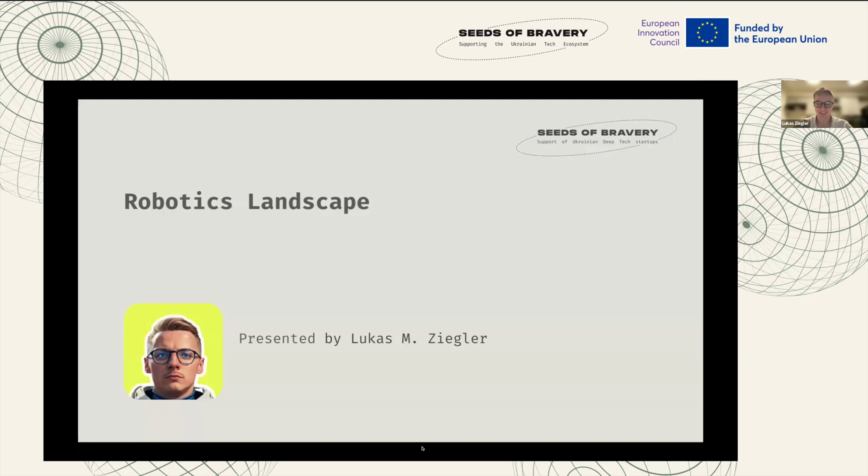Maybe before I start, I would like to share my presentation, just to start with the introduction and obviously with the topic that we're gonna discuss today.

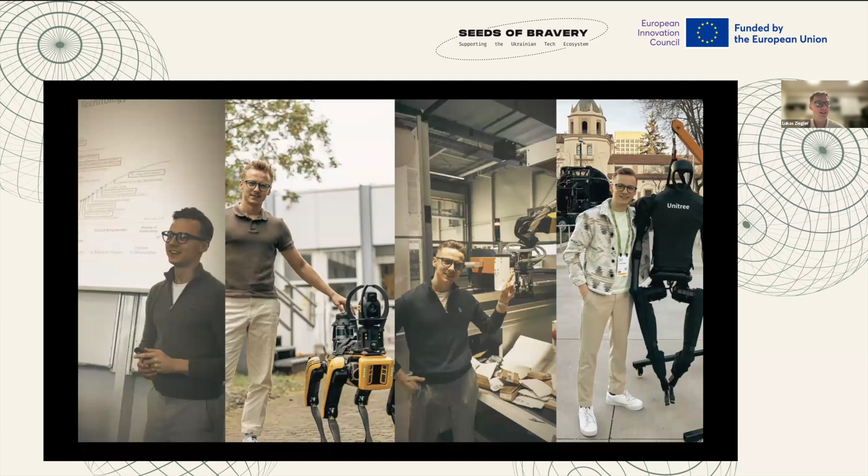So I like to call myself a robotics evangelist. My name is Lukas Ziegler, as I told you. It basically means that I love to talk about robotics whenever and wherever I am, about robotics applications, about use cases, about the trends and the new industries opening for robotics.

As Maria mentioned, I managed to build a 250,000 community on Twitter, LinkedIn, and newsletter, talking to robotics founders about their cool companies, just trying to learn the lesson of what's so important in building robotics companies, especially in deep tech, especially right now when AI is the real enabler of those companies.

I spent my whole life in robotics. I started as a programmer 7 years ago of Universal Robot Arms, then as a project manager for plenty of autonomous mobile robots projects. Afterwards, I joined multiple startups, starting from Poland, then in UK and also in Germany. The last one was Energy Robotics.

You can see also the spot from Boston Dynamics. So we were putting those robot dogs into dangerous environments, for example refineries, chemical plants, or power plants, where those robots were collecting data in real time. So we had a full-fledged autonomous robot system: data collection, data transformation with the help of AI and machine learning, but also very easily to connect via API to any system. It was really like an end-to-end robotic solution that we were able to deploy.

It was a startup around inspection robots, which is a pretty new market when you think about visual inspection for robotics. So I can also give you a couple of lessons learned from there.

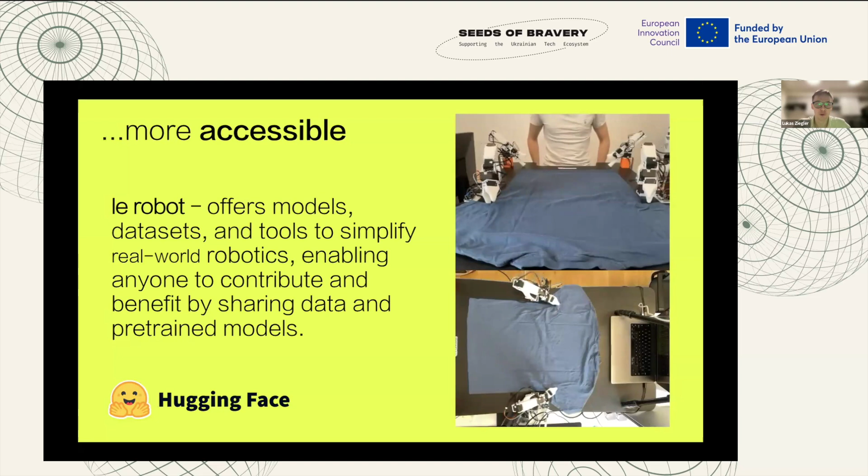In this video I'll turn the sound off. You can see they are teaching a robot arm to fold a t-shirt using a super low-cost robot arm that costs $300, by training a neural network with two cameras, one from a MacBook and one from an iPhone. The model itself you can train in about half a day. This is very important to make robotics accessible to everyone, not just people from universities or research labs, but anyone that can join that space.

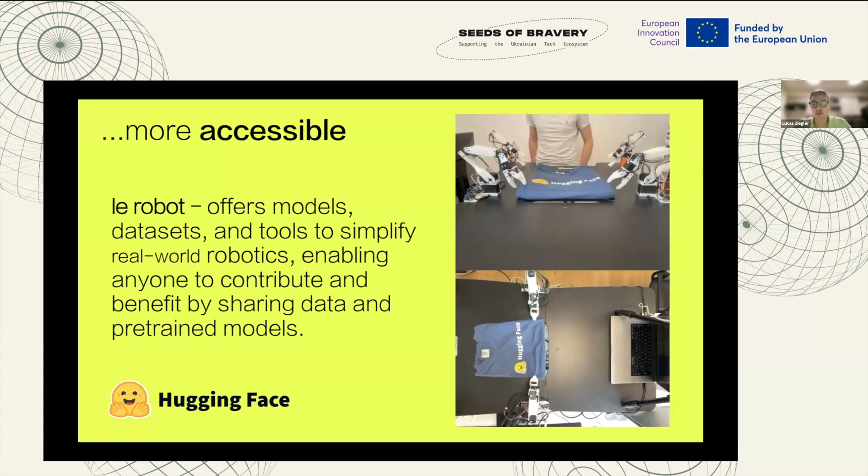And right now it's possible due to the lower entry point that these companies are helping us achieve. So you no longer need a super fancy university lab to start with robotics and combine it with different machine learning concepts. You can start small and use a lot of open source resources to do so.

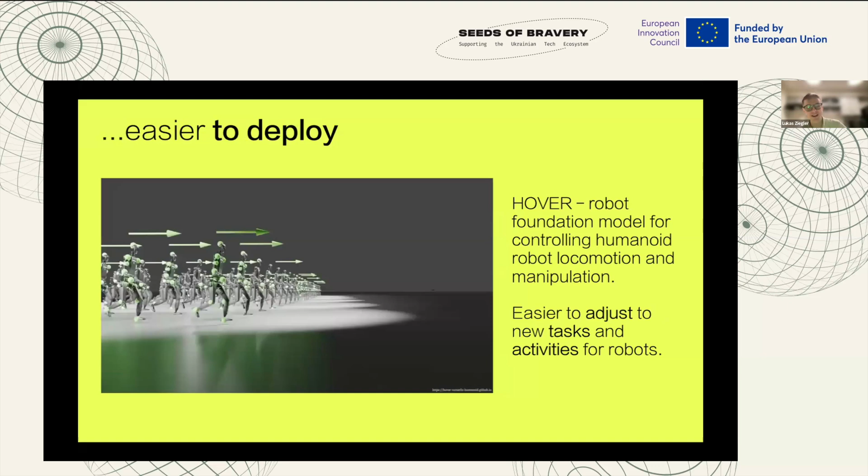The next one. I also told you about easier to deploy. So here I wanted to talk about Project HOVER. Imagine you can train a humanoid for an entire year, but in just 50 minutes. I know it sounds a little like Interstellar, but it's actually real. NVIDIA partnered up with top universities to create HOVER, a system that accelerates physics simulation by 10,000 times.

HOVER basically helps humanoids control their entire bodies. Instead of just training one separate task, they focus on a big picture approach, so you can have one system to rule it all.

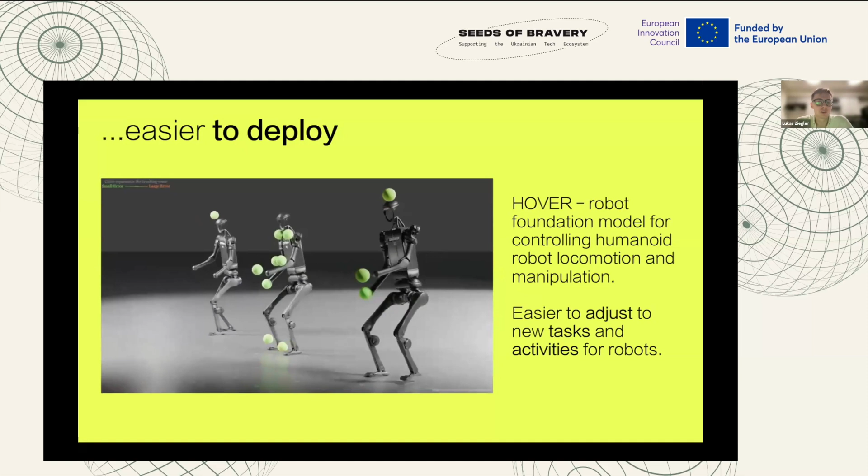Why is this so big in my opinion? Because right now we see a lot of humanoids succeeding with funding, doing first proof of concept projects. But it will really be a game changer when we have frameworks that allow you to copy and paste applications from one robot to another. Imagine uploading one task from one robot to another and the robot can immediately start doing it. This is what I believe those kinds of projects will make ease of deployment and ease of scale-up happen.

Because right now, when companies start with new technology, they typically start with a classical early adopter program or proof of concept with one or two robots, where they're just trying to capture how much value those technologies provide. Sorry, I saw the hand, Jody.

I think it may have been a mistake. Okay, no worries, super. But it's good I noticed, that means everything is working properly on Zoom.

So as I said, just to wrap it up, easier to adjust and add new tasks to robots. So this is when it comes to ease of deployment.

All right, and this is also a tricky one, but I decided to mention it because maybe not everyone is aware that dexterity is one of the toughest AI challenges, because tasks like tying a shoelace or tightening a bolt, tasks we do without even thinking, are super complex for machines.

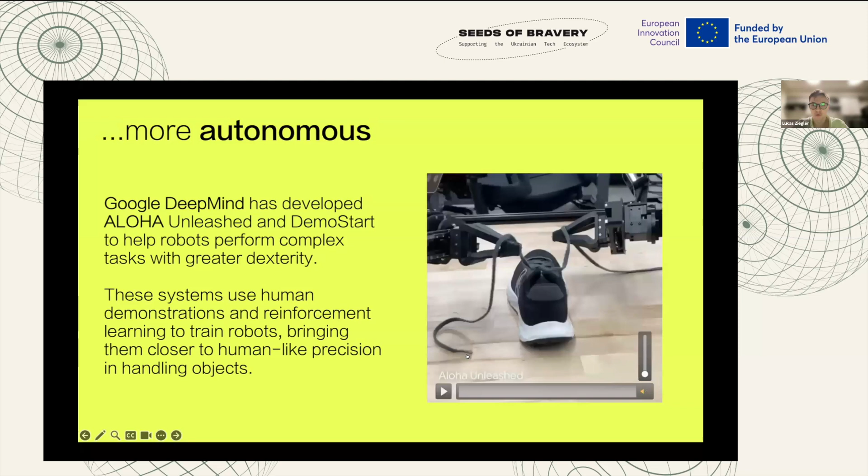This Google DeepMind research I want to show you is actually changing the status quo. First, ALOHA basically helped the dual arm perform complex autonomous tasks, for example tying a shoelace, as you can hear over here. And then you have the DemoStart, which teaches robotic hands more dexterity.

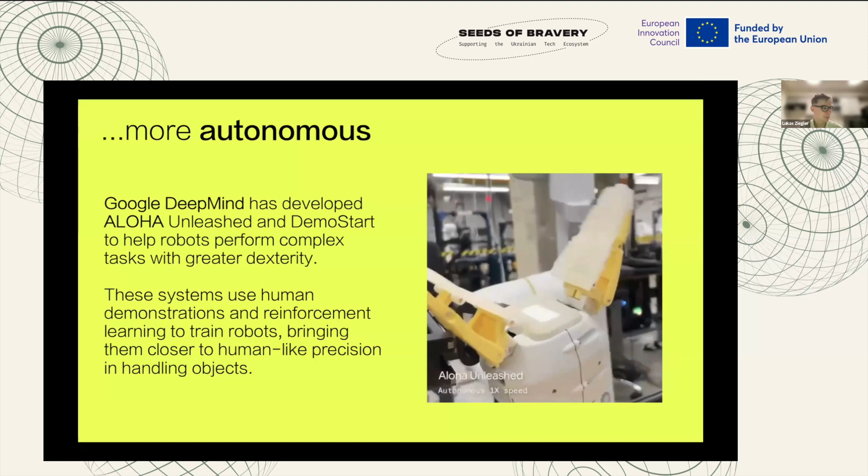Why am I so bullish about it? Because in the end, these frameworks will help us solve very complex manipulation tasks. We know we're trying to apply robotics right now into spaces that aren't super organized, into different changing environments. So robots must be more adaptable and react to the changing environment. This is why I'm so bullish on this kind of research pushing robotics forward.

All right, so let me go further, obviously to the key trends and rising tech. When we come to humanoids, just a second, something got stuck here on my side. There we go. So when it comes to humanoids, we all know what's happened in the last year. I don't have enough fingers to mention how many wow moments have happened during the last day.

So Figure raising more than $600 million as a funding round last year. Two weeks ago, they just announced that they might be raising another round for the Figure robot. It's the robot from California, from Sunnyvale, already working in BMW.

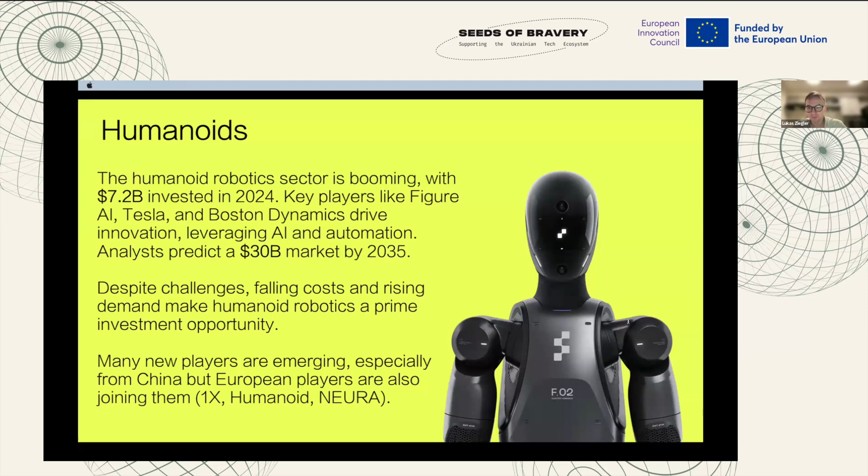All right, so let me go further. Here I wanted to show you the humanoid robot from the United States, Figure, in one of the BMW South Carolina plants. This is actually the first humanoid being placed in a BMW factory, and their robots are capable of carrying up to 20 kilograms, performing easy tasks, but end-to-end autonomously.

As we know, Figure recently broke their agreement with OpenAI when it comes to AI and foundation model development, and they announced last week that they developed Helix, their own vision-to-language-action model that helps the robot scale faster. They said that this use case you're going to see right now - inserting metal pieces into a machine - they were able to achieve it in like 8 to 12 months. Right now they claim they can do it in days.

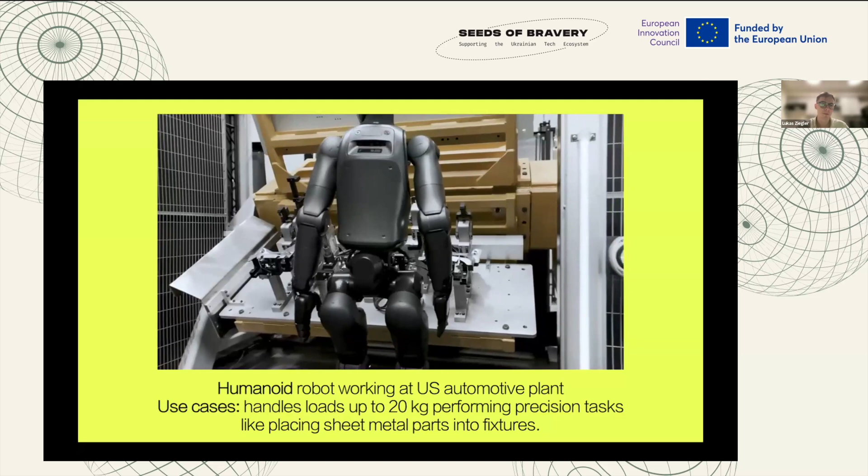With their new model, if you want to Google them or find them on LinkedIn, you can just type Figure, and you can see their latest video from yesterday where they showed the same robot doing repetitive tasks, but in a completely different industry - in a logistics center, third-party logistics center, where it was basically putting parcels from the moving conveyors onto the output trays.

It's Cobot, a startup also from America, founded by Brad Porter. He's the ex-VP of robotics from Amazon. He was actually the key enabler of the Kiva systems that everyone knows - the multiple thousand fleet of robots at Amazon to scale up. Right now he's come up with a solution that will help different industries with very easy tasks, but with a very specific range of applications. So it's not like the approach for humanoids, hey, you're going to get a general purpose robot you can use wherever you want, you can place it in your home.

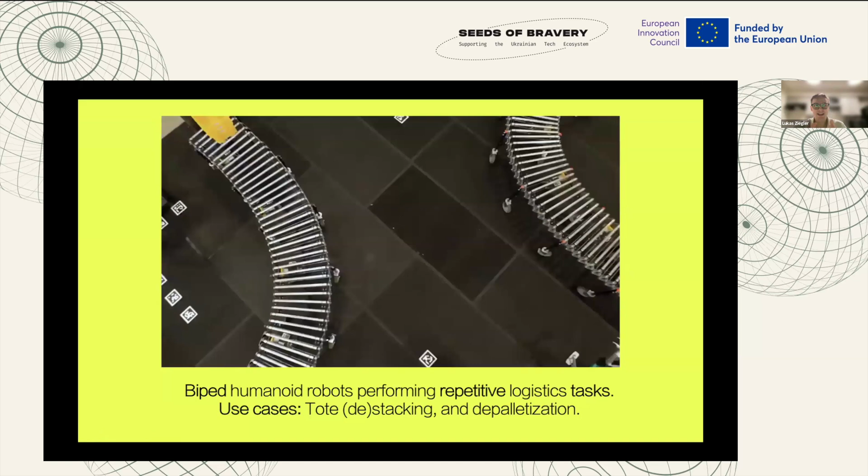Okay, let me show you a humanoid that accidentally became also a use case solver for one industry right now. So here you can see Digit. Digit is basically a humanoid robot developed by Agility Robotics, and this is a robot dedicated for the logistics sector. So what's so special about Digit? Actually, Digit can fit into any environment without any prior upgrades of the environment, so it can basically retrofit into it.

It also has a leg design that is inspired by birds, obviously not for the sake of mimicking nature, but to make sure the robot has the right agility and stability while working in the logistics environment with conveyors.

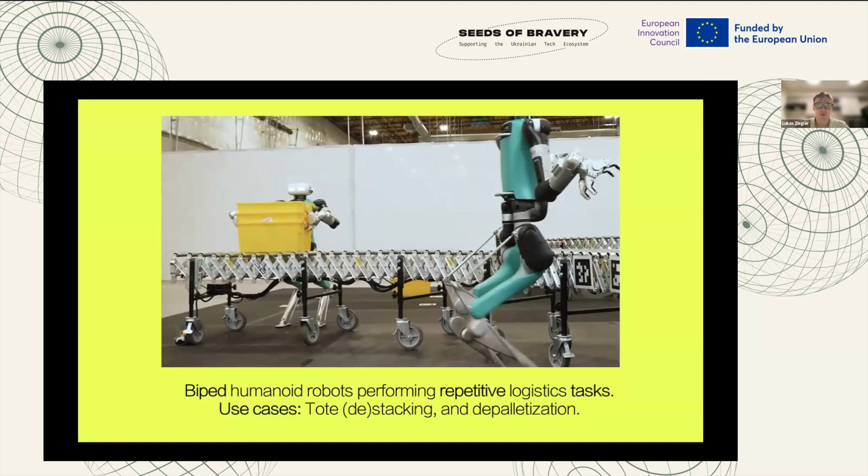One can also notice the specially designed and custom gripper. The gripper actually helps to work with totes, and there's a lot of applications with totes for that robot. So it's stacking, destacking, palletizing, depalletizing, but also transfer applications, for example taking the tote from the conveyor and putting it onto the shelves.

So there's really a lot of use cases, and actually that's not just a POC. Those robots are already working for top Fortune 500 companies like GXO Logistics or Amazon. So those are already working and applying value in a lot of companies.

And here I wanted to show you a very cool video also from Brightpick, a specific purpose-built robot, also for logistics use cases, basically to work with shelvings and totes. No special flooring or guidance required, so they are fully autonomous. Via API, they're able to connect to your warehouse management system, so they can get the orders and know what they need to do at one time, along with the fleet management software.

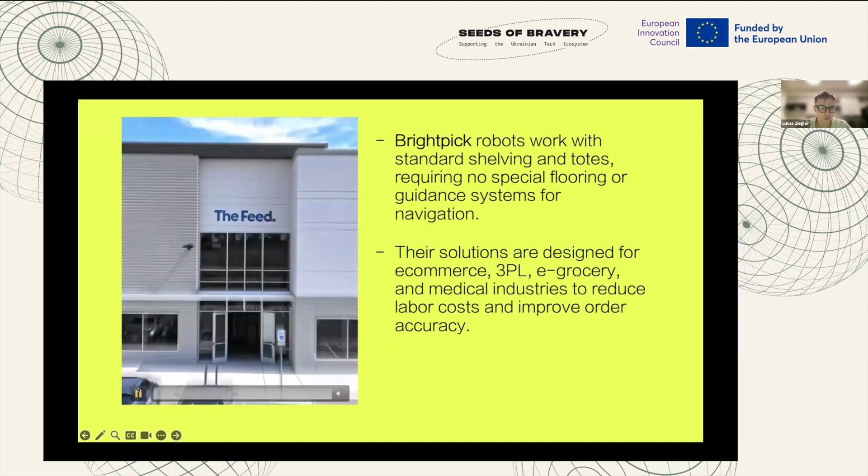So let me also show you what a specific purpose-built robot can look like. As you can see, it can walk with wheels, so it's like having legs. It also has an arm, so it's like having arms. So it's like a less error-prone humanoid robot. They can also do manipulation challenges at a certain height, as you can see.

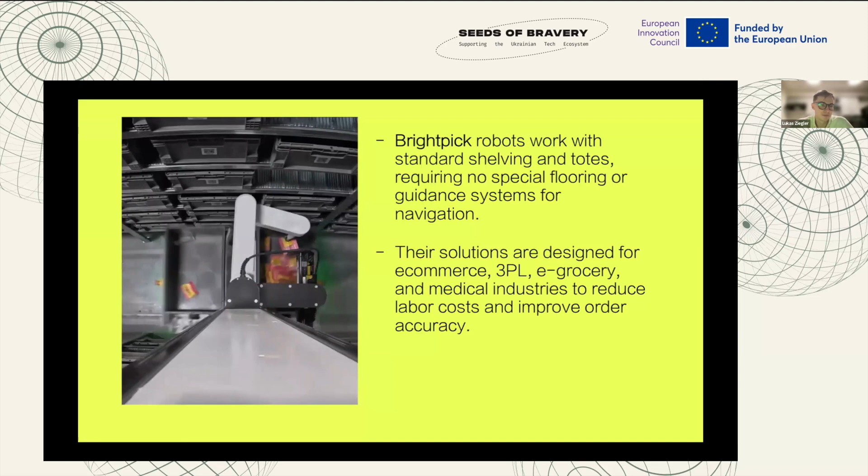And they also got in total around 20 million, I believe, in funding. 12 million was like 2 or 3 months ago. It was also dedicated for the expansion to the United States.

All right, so that's when it comes to that.

So what kind of products can you expect in enterprise software? Data analytics software that can, for example, improve robotic performance over time. But you can also see a lot of interoperability solutions, for example Energy Robotics. Energy Robotics is a software platform for inspection robots, robot agnostic, which means...

you can connect different kinds of mobile or legged platforms like Boston Dynamics, Anybotics, and plenty of others. This means, in the end, you as the asset owner, oil and gas company, chemical maker, can have just one platform to rule them all. You don't care if you have different types of robots, because we all know there is no perfect robot to do all kinds of tasks. That's why it's so important to have an orchestration platform to do so - data analytics and orchestration platforms that allow real interoperability around your robots.

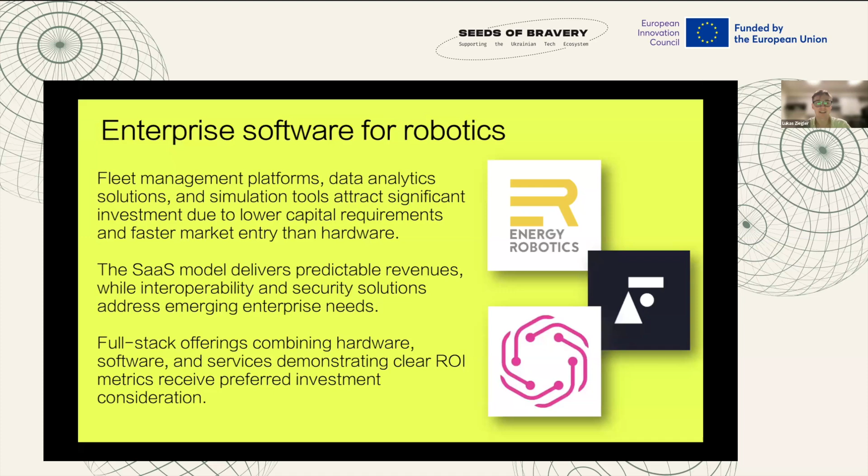We all know that these days robots are not just about hardware. It's actually a combination of superior enterprise software and a great piece of metal, which is the hardware. So it must be both - applying the robo brain with AI and outstanding tech when it comes to mechanics and hardware.

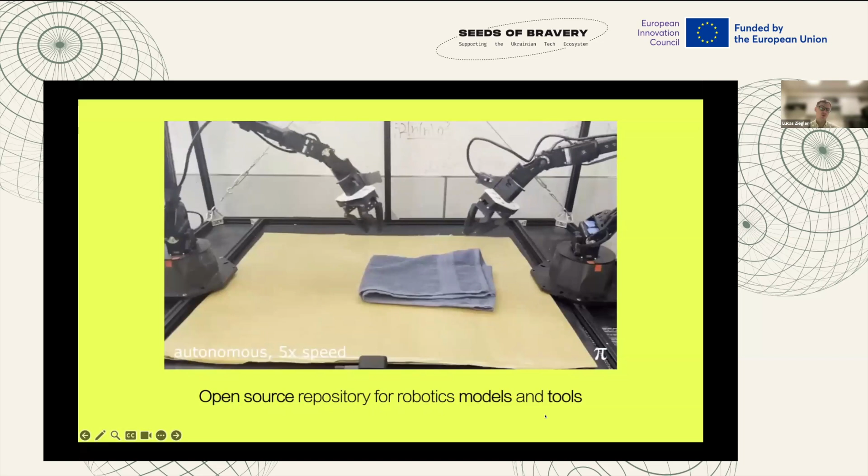Here I would also love to show you the Physical Intelligence. Finally, robotics is also getting accessible to everyone, as well as with Hugging Face. Can you see it? Yeah, you can see that. So basically Physical Intelligence created an open source for robotics with different models and tools, and openpi is an open source repository for those.

It includes two main models: the diffusion-based vision language action (VLA) and an autoregressive VLA. Both models come with pre-trained checkpoints, based on over 10,000 hours of robot data, and they can be used and fine-tuned. And as you can see, there are also some super low-cost robot arms you can use to really start doing a lot.

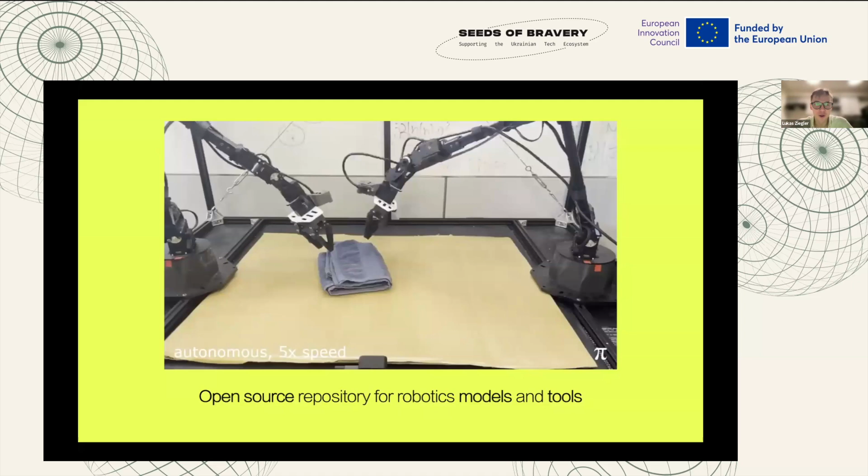So like with ChatGPT, and then a lot of ChatGPT wrappers as new companies, you can right now think that you have pretty much everything needed to build a robotics company - with cheap prototyping hardware, open source libraries and code you can experiment with to solve a really specific problem.

All right, and obviously the tech and key tech ecosystem trends - let me start with digital twin, because it's not business related. Digital twin and simulation is also what I mentioned with NVIDIA Hover. These are approaches that help us iterate and scale robotics technologies faster.

In simulation, you can enable multiple - and when I say multiple, it can be even thousands of nodes that can run the same simulation, collecting data for you and improving the overall result of robots working. So digital twin and simulation is definitely good for all companies creating a robot from scratch and wanting faster iteration over time - that definitely helps a lot.

Cloud robotics platform, I already mentioned that, but we all know that right now robots are nothing without software.

So those two elements must be combined. And as we know, cloud is very often used for all these aggregation, orchestration, data analytics platforms, teaching platforms, as well for robots. So I believe that is huge.

What I observed also with my journey with Energy Robotics, but also with other companies I've had the chance to speak to, it's very important to enroll a kind of early adopter program, so you have your clients as your advocates, and they help you see what kind of technologies and use cases are generating the fastest ROI, and where the robots are applying the biggest value. So the early adopter program is a great way to have industry insiders telling you what the robot must do in order to have the ROI assured.

So yeah, those are the trends. And right now, last but not least, I would love to give you a couple of free, simple videos. I see that I have just 3 more minutes, so I just wanted to show you a couple of European technologies in robotics that got funding recently.

So here you can see Neura. Neura is doing cognitive robots, not only humanoids, but also arms and mobile robots. Cognitive means that they don't just see, but they can also feel, they can hear, and they have multiple different communication protocols to connect with humans. The robot, actually, fun fact, is called 4NE1. When you read it fast, it's basically 'for anyone'. So they want to capture the market for homes.

I had a chance to meet David Reger, the CEO of Neura Robotics, last week, and he also said that obviously it's more challenging because you require a really error-proof and injury-proof solution at your houses, when you do not have so much control over the environment. Just imagine a 50-kilogram piece of metal just falling down on you. So all the safety requirements definitely need much more fine-tuning.

But I know that they already landed their first proof of concept with one of the biggest tier 1 automotive companies, ZF Group, also doing pick and place processes. And as I mentioned, they raised 120 million in their Series B recently.

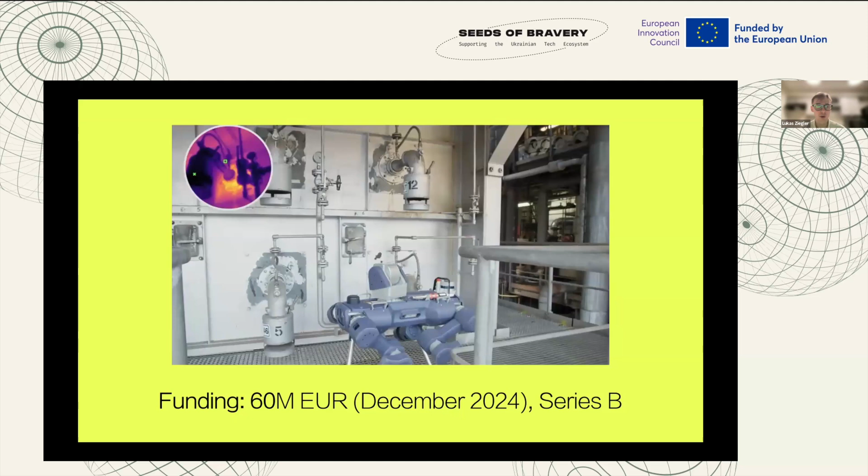Then, last but not least, another Swiss company that is trying to make Boston Dynamics in Europe: Anybotics from Zurich. They created this animal robot, which is explosion-proof and can go directly into explosive zones instead of your workers. So just picture this: every 20 minutes, this robot is collecting around 20 data points and immediately, via API, sending it to your superior systems, where all the calculations and AI operations can be done upon that data. So it's not actually just about gathering data - it's about gathering data and then creating business insights straight from them without human intervention.

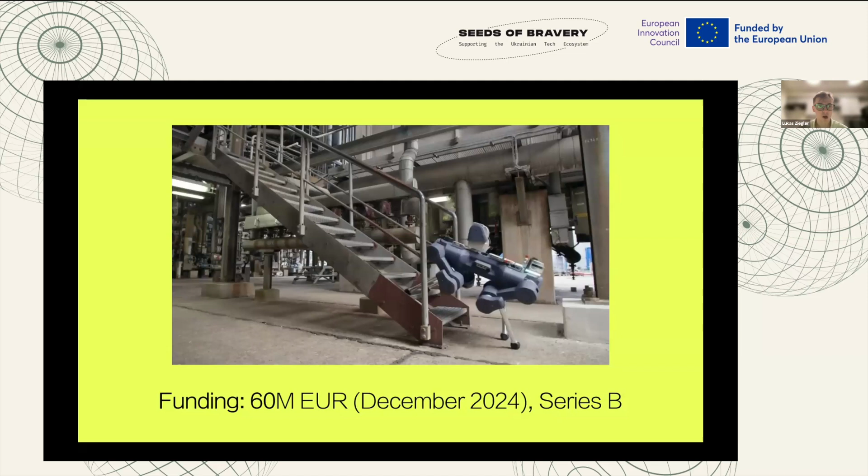So you have end-to-end data collection with inspection robots: an autonomous robot collecting the data, sending it to the system, transforming it into business insights, and you just get those insights - for example, overheating issues, or the value of some assets being too low or too high.

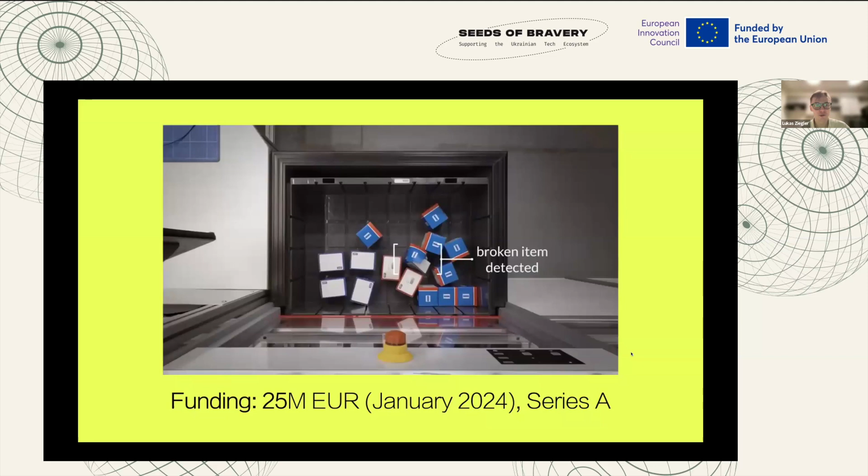And let's also reinvent the wheel - or maybe it's better to say, let's reinvent the arm. So you can also see here Sereact, a company from Germany, got 25 million in funding to do bin picking better at logistics centers. As you can see, you can do it with these robots, but you can also put a $100K plus robot to do those tasks for you. And by the way, yesterday a company from Warsaw, Nomagic, got 44 million in funding for the same use case - for the singulation of objects.

So yeah, Maria, I saw your hand raised. I know I'm already a little bit... No worries, no worries, you have time, you have time.

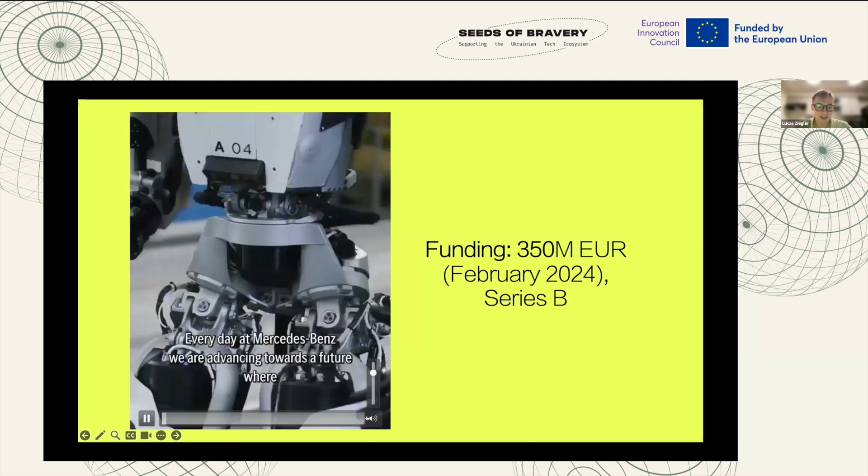Oh, super. So last but not least, I wanted to show - I know this robot every day is a little bit niche because everyone is talking about Figure - but Apptronik, actually a Texas-based company, also had the chance to put their robot already into Jabil and Mercedes-Benz factories, and they raised 350 million euro. They're also partnering with Google DeepMind when it comes to creating the reasoning part of the robots.

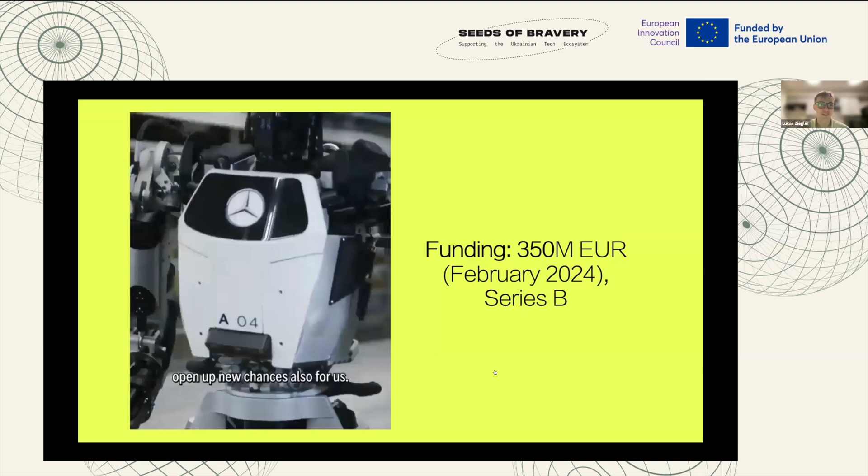So yeah, I just wanted to show you what are those hot types of companies, so then you can extrapolate from there and see what are those trends going on.

Couple of insights, basically: build, learn, and scale. That's what we were talking about. Focus on action, talk to your client, land the first client, and actually get the insights from them. With solving problems and delivering value and repeating it, it's very important also to have this early adopters program, so you actually have an industry insider telling you, right, the tech is cool, but we are tackling the wrong problem. This is very important, right?

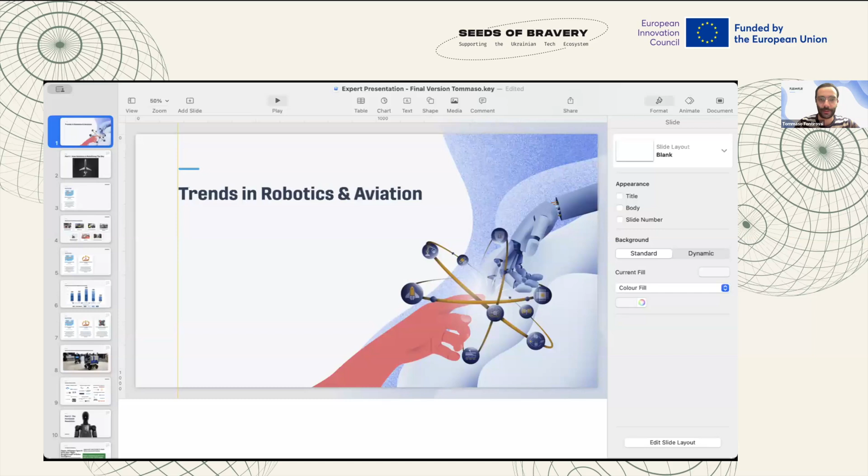Cool, hi everybody. As Maria was saying, I'm Tommaso. I work for the Plug and Play office of Vienna in Austria, but I'm actually based in Valencia, Spain. With the Vienna office, we are pretty much focused, in a broader sense, on smart cities. But most of our corporate clients are either airports or airlines, so we are pretty much focused on the aviation side.

Robotics, as Lukas was saying, is a really hot topic right now in tech, and it's something that our corporate partners are asking more and more about. They want to know what's happening in the space, they want to meet new companies, and they see real value in adopting robotics. So I will try, first in the presentation, to identify a little bit what are the trends in robotics and aviation together. Then I reserved a bit of space for talking about humanoid robots, and thanks Lukas for bringing up that topic, because I will be happy to expand a little bit on what you have already said.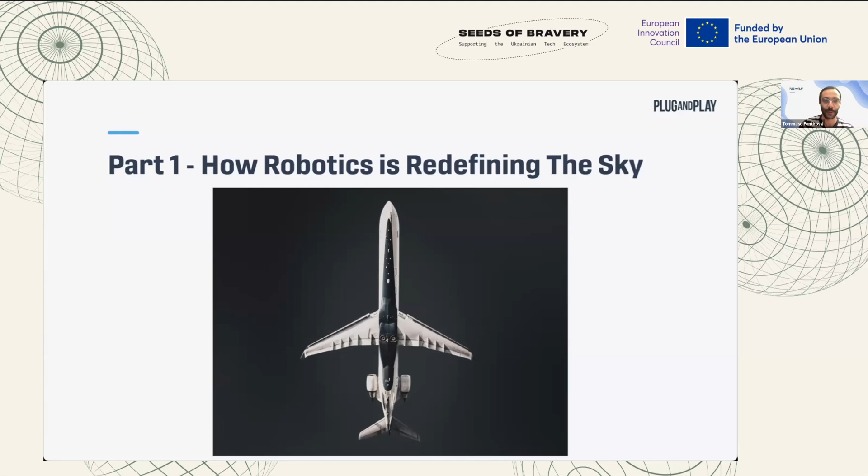First of all, robotics is transforming aviation. One of the biggest challenges that airports and airlines are currently facing is labor shortages. It's not only true for airports, of course, it's a trend happening worldwide, but airports especially are really suffering from this. A lot of data suggest that in a few years airports will need way more workers than they have now, because of these strong labor shortages. Studying this, we realized that robotics is one of the solutions to this problem, and we see a wide range of applications for robotics within aviation.

These are some examples. We see value in baggage handling, because these operational works are causing back pains and various kinds of problems to workers who are not willing to do them anymore. It's not an appealing job to them anymore. So baggage handling is one of the first requests that we always hear from our corporate partners.

It's a pain point that we have really seen, but of course we have a lot of other use cases. We have FOD removal, in which you're basically removing debris from the aprons where planes are landing. We see robots employed in aircraft maintenance, in cleaning, helping people with reduced mobility. So the key point here is that we see robotics as a key force to transform and reshape aviation.

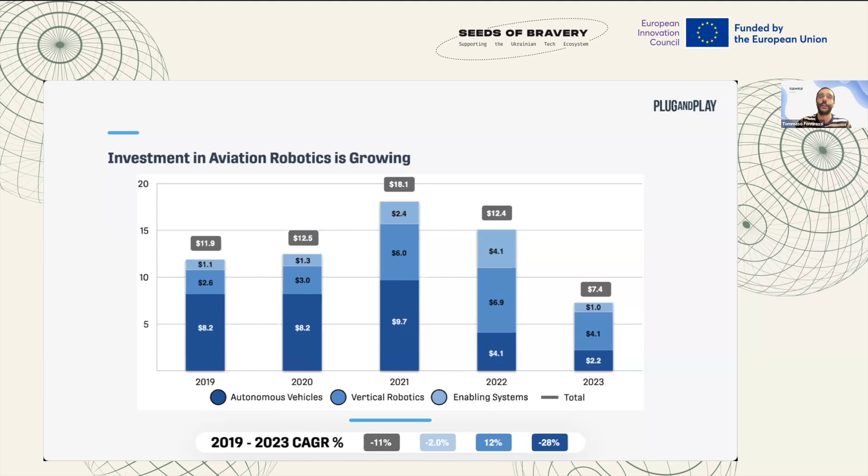As Lukas was saying, they don't cost too much money. They can be deployed easily. They can fulfill a specific task. So the path to adoption and the value is easy to show to companies, and they're easy to adopt. Companies still see a huge value in adopting them.

The third trend we see is startup and corporate collaboration. At Plug and Play, we have some corporate clients, and one of the things we do is introduce and make connections between corporates and startups. Some of the corporate clients within the aviation space are really leading innovation in the sector.

We have partners like Vienna Airport and Aeroporti di Roma, and we're helping them do a lot of POCs. This is a cool example of a POC we did with Aeroporti di Roma. This is Autonomy, a startup which developed the Autobot, an autonomous robot used for bringing food and drinks and serving people waiting at the airport.

This is just an example of how these connections we can make between startups and companies can really bring value at the end of the day to the final user of this innovation and the beneficiary, the clients. Then, while doing this white paper, we did a robotic startup map, and we tried to identify which players are really having an impact.

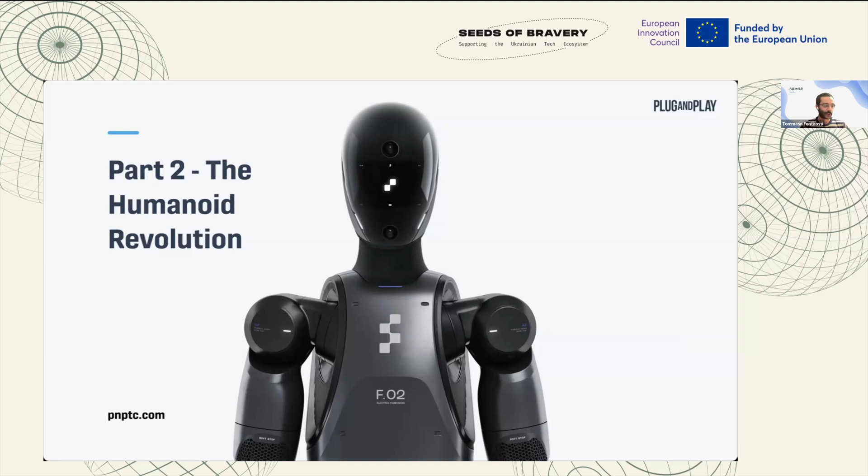That was it. As for the aviation side, this second part, I wanted to spend some time talking about humanoid robots. Doing research for this aviation paper, we realized one of the hottest topics in robotics is definitely humanoid robots. We know the space is buzzing, and every day a lot of news comes out. We see new partnerships, we see VC money flowing around to companies, for example Apptronik, as Lukas was mentioning, also Figure AI. We see partnerships, we see a lot of movement. There's a huge amount of things happening.

Humanoid robots as a concept are quite simple. They are robots that mimic the way humans are and interact with the real world. But I also think it's beneficial to show a video to actually get how they work. This is a video that came out recently, by Figure AI, showing Helix, the new vision-language-action model, and I think it's pretty cool. Let's see a little bit of this, and then we can talk about it.

Hey, Figures, can you come here?

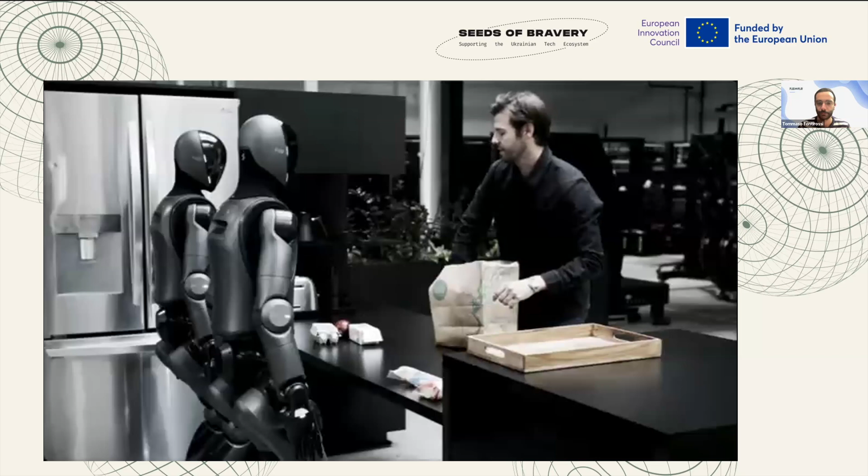Okay, I'd like to try something new. Even though this is the very first time that you've ever seen these items, I'd like you to use your new Helix AI and try to reason through where you think they belong in the scene, and then work together to put them away. Does that sound good?

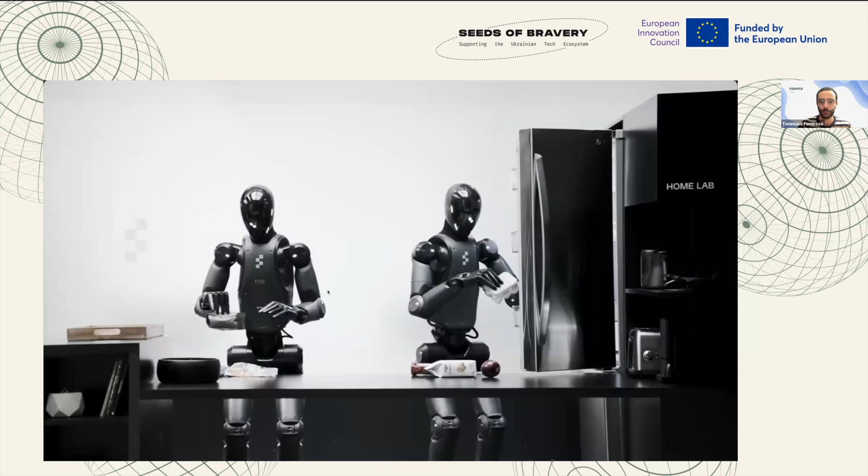I mean, that was pretty impressive. I don't think I have to explain to you why that was impressive. As I was saying, this was the humanoid robot F.02 by Figure. And it is pretty impressive because really humanoid robots are starting in a way to resemble us, and they're actually finding some real world applications.

It is also interesting how, first, we are seeing a lot of players coming up in the space, and it is really interesting to see that these different players are trying to tackle the market from different angles. For example, as you have seen, Figure is really trying to play around the human-like interactions, these humanoid robots really speaking with us like humans and acting as humans.

But, for example, 1X is a Norwegian company tackling the market from a different angle. It's a fun fact that they were the first humanoid robot company to actually put a picture on their website of a humanoid robot hugging a person within a domestic environment. This suggests that they see the application of humanoid robots in homes, in the B2C market. While Tesla, for example, is really trying to rely on humanoid robots to scale the production of cars to mass production.

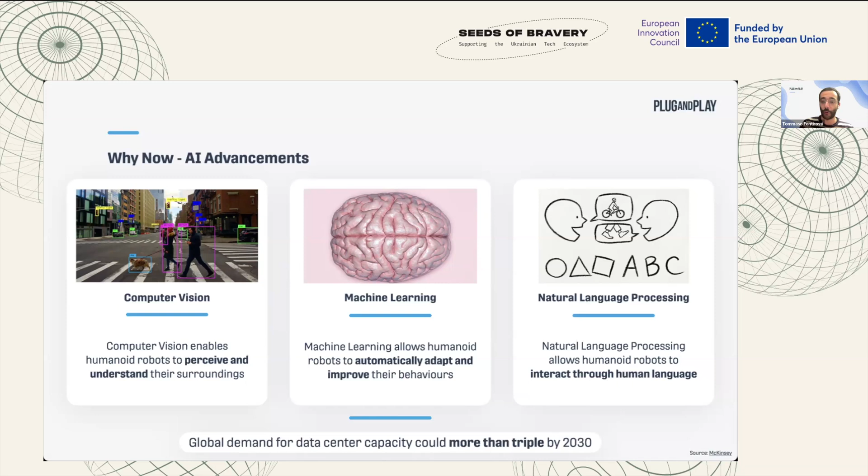So basically, these 3 advancements in these fields are pretty much empowering humanoid robots and robots in general to become more and more similar to humans. And it is interesting to see what this implies for technology. Again, here we're talking about vertical robots, they're still strong.

With advancements in AI and technology in general, we are switching from vertical to horizontal use cases, meaning robots are no longer conceived to perform a single task but are programmed to be general purpose.

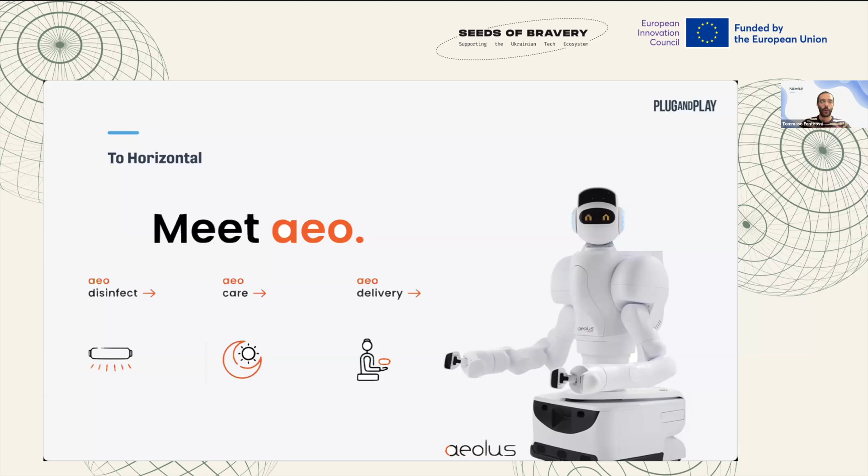This, for example, is EO from the company Elus, which we could call a robotic butler for domestic environments. It can clean, take care of people, handle delivery, and help with security issues. So we are switching from robots conceived for a specific task to general purpose robots, which is pretty interesting.

Doing this job, we receive a lot of information every day. One of the things we need to do as an organization, and in general as people working in tech, is really try to find the signal among all this noise and see how these technologies can truly bring benefits to people.

We see humanoid robots being adopted in a lot of use cases. We see them in manufacturing, working in assembly lines alongside humans. We see them in aviation as well, many use cases there, but also in healthcare, assisting nurses, or assisting clients in a retail environment.

This is a cool video, though Lukas has shared a bit of it already, so I'll skip it for time. Still, it's a super cool example of how humanoid robots can be employed within a factory. This is a POC that BMW is doing with Figure AI, the same company we saw in the first video of my presentation. Seeing this, we might believe humanoid robots are already there and could be deployed by companies.

But the truth is they can't really be deployed on a mass scale yet. So it's interesting to understand why this is happening, what's hindering mass adoption. We identified three trends.

The first is technological complexity. The hardware sometimes still struggles, although it's really good now. We've reached a high level of technological complexity and performance, but the hardware still struggles with some tasks, especially responding to real-world unpredictability. As humans, we react fast to what's happening around us, but that's not really true for robots, due to both software and hardware. The problem with software is latency. There are plenty of problems, of course, the AI isn't there yet either, but one issue is the latency in responding to real-world unpredictability. So humanoid robots still aren't able to respond as quickly as we do to changes outside, which raises concerns about their utilization. They're simply not there yet.

Another issue is cost and scalability. We've said industrial robots are decreasing in cost, and this is true, but humanoid robots are still quite expensive because they're a really complex product, combining artificial intelligence, hardware, and biomechanics. So the cost is really high, especially for a small organization to adopt them. Mass production hasn't been economically viable yet, so there are still challenges on the production and cost side.

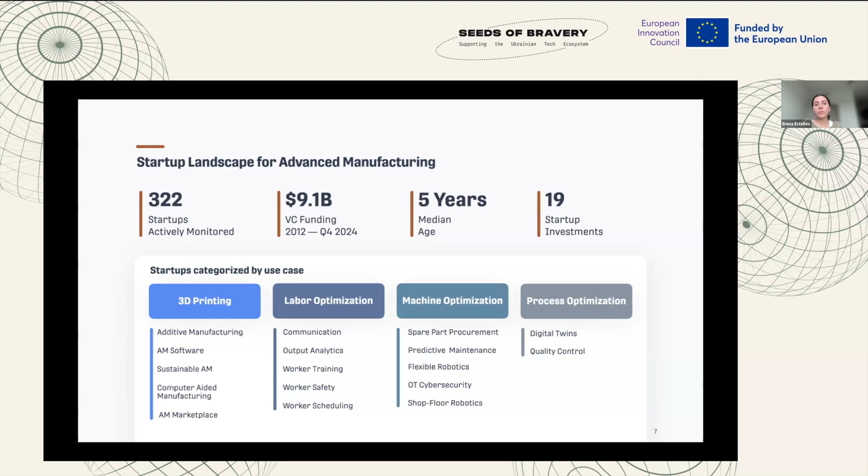Before jumping into logos and startup names, I want to talk about the main difference between maturing technologies and emerging technologies. Maturing technologies are all these technologies that have passed early stages of development. That means you can find subcategories like worker safety and communication, digital twins, quality control, or predictive maintenance, where startups have graduated and raised more than 50 million in funding.

They are also in the market for a few years, but from a corporate perspective, when corporates want to start innovating, they need to ask two questions: where are my needs, and what approach do I want to take when innovating? Do I want to follow a more traditional approach, or do I want to take risk and follow a non-traditional approach?

So maturing markets or technologies are good subcategories for you if you don't want to take the risk and just want to innovate right away. In these subcategories you'll find major players that are well funded and well established. That means you cannot negotiate the price, you cannot ask for customizations, but there's no risk - you can start working with these companies right away. That's the takeaway here.

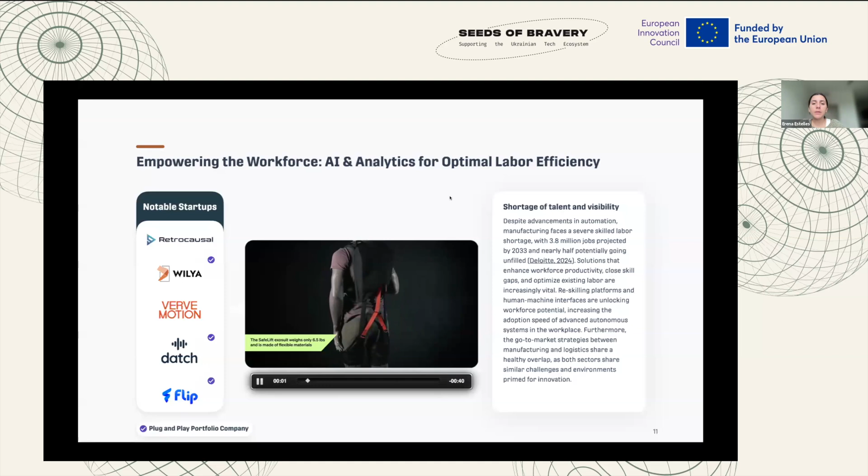They are building this exosuit that can suit up in less than a minute. The wearable tech has two batteries that can last up to 12 hours, so an entire shift work.

And then they have this really cool technology, the assistive lifting force, that offloads up to 40% of every heavy item that they are lifting or holding, like a heavy box. Then you can see here that they have two different sizes, which is nice to have, right?

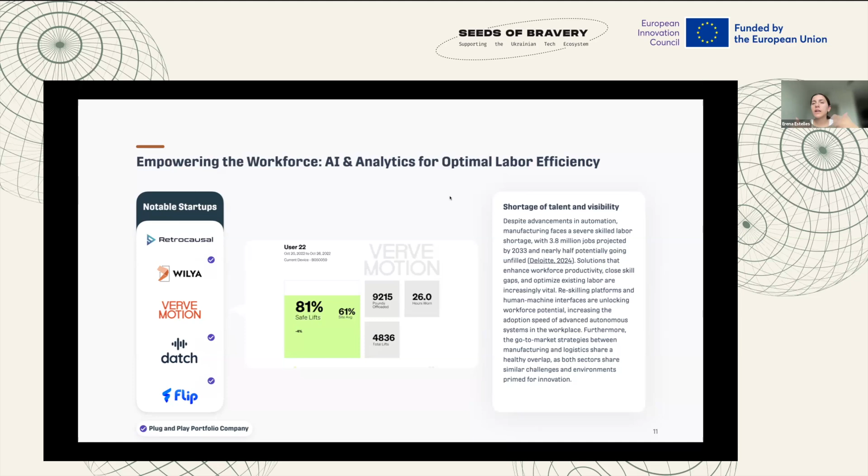And then the cool thing, something that stands out for me, is they have 3 sensors, so they gather real-time data, and then they can provide insights to the company on information like what are the business units or employees that you should be paying more attention to. And then they offer some coaching programs with videos or tutorials on how you can improve your precision to reduce injury risks, but also to keep boosting the productivity of the employees.

And this is a case study, a real case study between a corporation and a startup. So Europart is a leading partner for commercial vehicle workshops and operators of trailers, vans, and buses in Europe. The company has more than 1,700 employees across 28 countries.

Basically, Europart realized that they were using the same traditional systems to communicate what each employee should be working on every single day between different business units and between different locations. So they were using bulletin boards.

So something like super traditional, I will say. So basically they decided to change that and work with Flip. Flip is like the Slack, but for industrial companies.

Through this app, you can chat with other employees, receive real-time task assignations, and receive updates or general news that could be relevant for you. But also it's like a one-stop shop to get all your pay slips and communicate with HR as well. So Europart, after 6 months of this deployment, did an interview with all these employees.

And 75% stated that they were more satisfied within the company because of this new communication tool. Just a fun fact, yesterday I was talking with an industrial big company doing more than 11 billion in revenue, and I asked them if they had this problem. They said yeah, we didn't have any communication tool until like a year ago. So even medium-sized and small companies don't even have a Slack or something to communicate properly. This problem is still there.

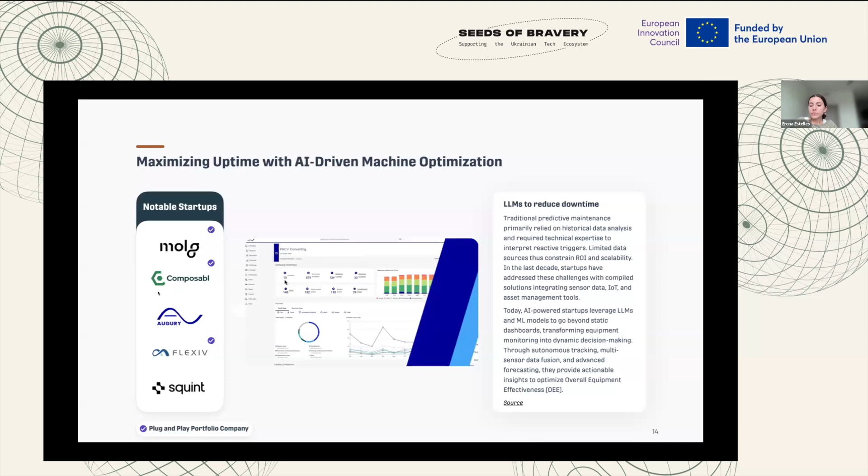In 2023, Colgate decided to partner with Squint, not because they had any problem or were struggling with something, but because they wanted to enhance shop floor workers' experience. They started working with Squint and did the first pilot in one of their biggest facilities, in Mexico if I'm not wrong.

Some early results show that the completion time for every task with the machine was reduced by 50%, which is amazing, because if one quality operator can do quality inspection on 3 machines per day, this doubled the number of machines they can inspect.

It also reduces onboarding time for new operators, because they don't have to use manual procedures to learn how to work with the machine step by step. They don't even have to rely on experienced staff or ask questions, because they have everything on their phone.

This is really cool and super simple. From a corporate perspective, the most appealing thing is they don't have to buy any external hardware—employees can use their own tablets or phones.

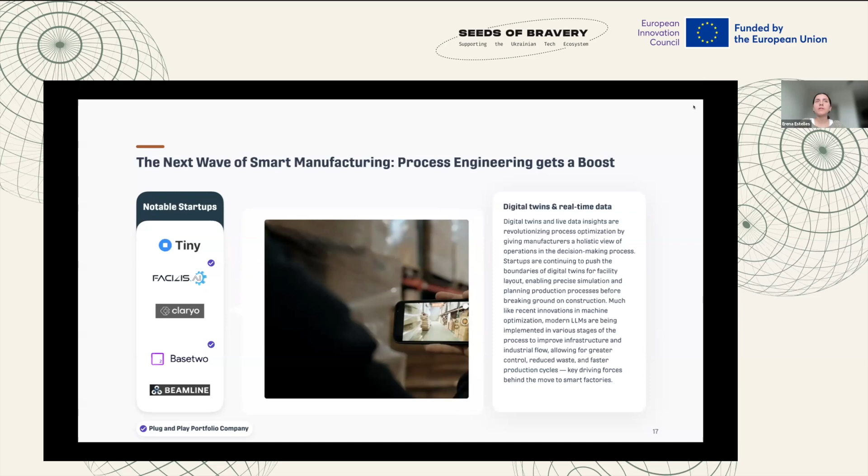They are building a digital twin, not just for a specific part or machine, but for the entire warehouse. It's very useful for inventory management - traditionally inventory management has been done by manually counting inventory or scanning barcodes. Let me play a video for you.

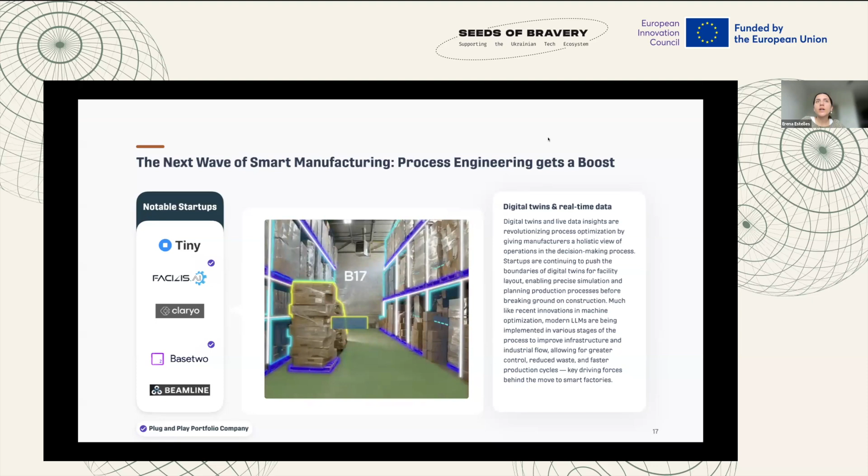You can use your phone or any drone to scan the entire warehouse, and you'll get all the data you need - where all the items are located. This real-time information gives you alerts like: this item has been misplaced, or you're running out of inventory here, or you should optimize the space because items that sell faster are at the end of the floor or warehouse.

Really cool company, because we've seen a lot of computer vision companies, but usually you need to buy extra hardware. Here you can use your own phone, or a drone if you have one, which is also useful.

The next startup I want to highlight is Relimetrics, working with HPE. This is something pretty similar to what Claryo is doing, but they use a tablet that you need to buy, and you need to onboard all the machines. They are doing quality inspection.

HPE, one of the leading manufacturing companies selling servers, wanted to automate server assembly quality assurance, which was being done manually by quality operators. This was labor intensive and prone to error due to human fatigue and the inability of operators to catch critical defects. So HPE partnered with Relimetrics to automate the end-of-line quality inspections at its server assembly lines.

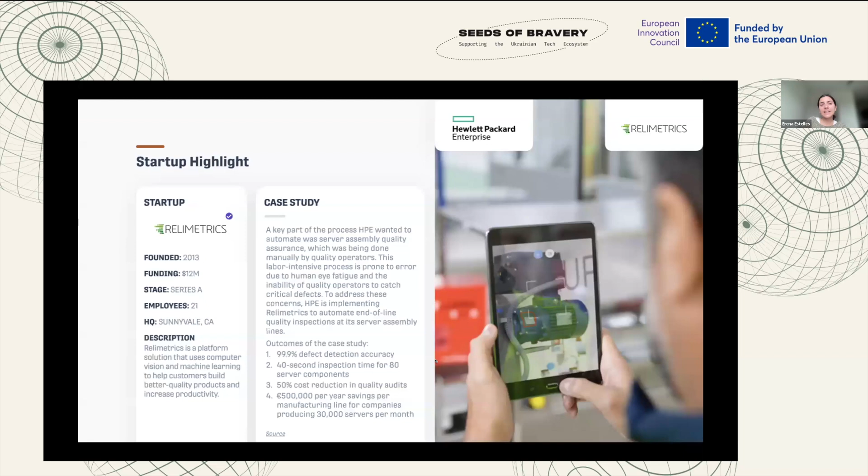I don't know if there's anything else. Just to finalize, I want to show you some of our plug and play investments in manufacturing tech - all portfolio companies we're working with. I didn't highlight robotics today since my colleague covered that previously, but I'll mention Maven, a humanoid hardware company we recently invested in. You won't find much information on their website, but they're building a really cool humanoid for industrial applications. And yeah, that's it.

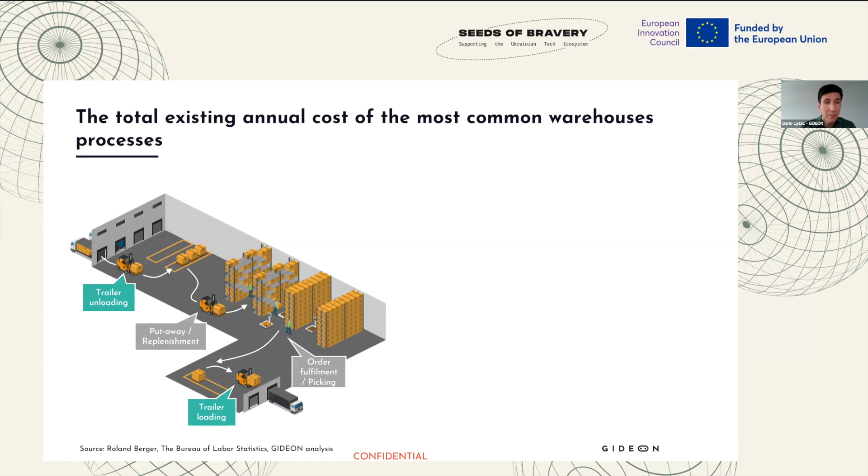So how do we choose our application? I haven't talked about it yet, but you saw it in the intro slide: automating loading and unloading. Warehousing in general consists of several different applications, and we can specify three main ones: trailer loading and unloading, put-away and replenishment, and order fulfillment. Those three applications are, some of them untapped, and some of them huge opportunities.

So we did some research and understood that trailer loading and unloading, only in the US, is a $45 billion market. Maybe not everything in that operation is automatable, but even if we can automate half of it, it's still a huge market. That's how we decided to go into this.

And the key lesson here again: listen. Our first customers actually pointed us in the direction of the trailer loading and unloading market. We weren't aware of this gap, weren't aware there were no solutions out there that solved this. As we listened to our key customers and early partners, we decided to pivot in 2020, started developing a new solution so we could go to market in 2023 selling trailer loading and unloading solutions. So the key lesson: listen to your customers, they know their applications better than we do. Also, the market needs to be big enough for anyone to care, especially investors. That's one of the key learnings here.

Going to the product evolution, when we talked with Maria and the team, we thought it would be helpful to share our product evolution so you get a feeling of how it evolved throughout the years. I won't be able to cover everything in all 7.5 years in just a couple of minutes, but to help you understand how we decided to get to trailer loading and unloading, I'll show you what we started building initially.

When we started Gideon, we started building sensors because we realized there were actually no sensors available on the market that would serve our application. Then we started developing AI solutions to help us, again, in the applications we were operating in. We focused on detecting objects and obstacles, especially in warehouse and manufacturing environments. This helps us understand the environment on a much deeper level.

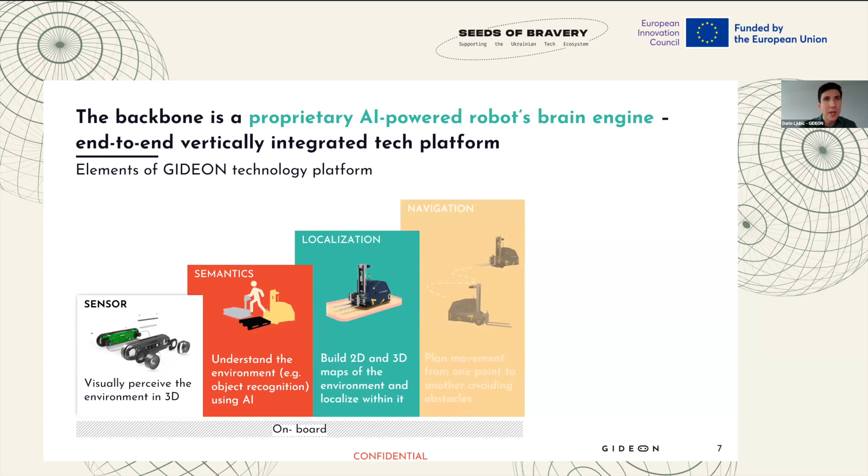Then we started developing all the backbone algorithms for robotics. If you're familiar with mobile robotics, this is a common theme: you need a localization algorithm to localize in an environment, you need to navigate from one point to another, you need to coordinate a fleet of robots if you're operating one, and there has to be a warehouse execution layer that communicates with customers' systems. As we built this portfolio of software solutions, for robotics you cannot just pick and choose, you need everything to be able to do the application you want.

So when we built this, the key lesson we learned is having valuable IP really helps from an investment perspective, but also from a differentiation perspective when it comes to securing new customers and making sure we have our place in the market. So we developed all this technology and decided to focus on the first application, A2B transport, with the robots you can see on this slide.

Basically, a pallet would be placed on top of the robot and we would transfer it to another part of the warehouse. It was good, it went well, we had successful deployments. But what we realized, based again on customer feedback, is that this market has a limit. It has to be a very modular solution, it changes from facility to facility.

There are so many competitors out there doing the same application. All of the software that you saw on the previous slide, everything that we've been building, we could not show our differentiation with this hardware. And that's one of the hard parts about robotics. You have to marry hardware and software. It has to work really well and it has to show the differentiation. Basically, the differentiation we had on the software side was not visible on the hardware side and on the application side.

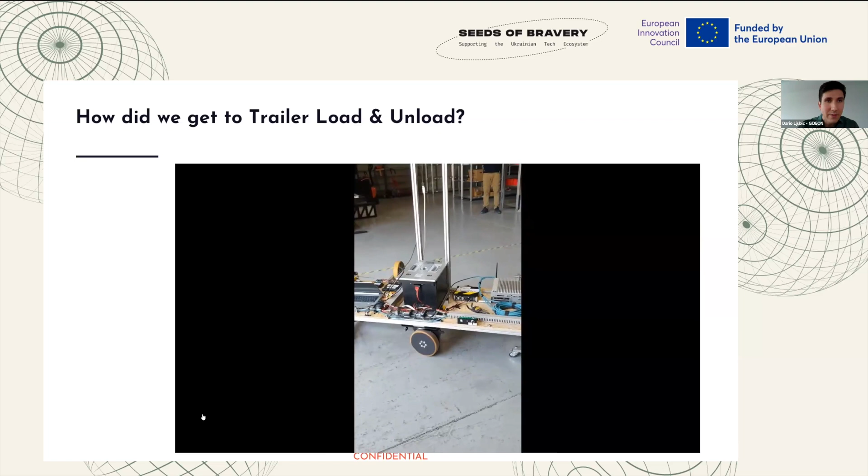In 2020, we started building our trailer loading and unloading solution. Believe it or not, this was our first forklift. It doesn't have to be fancy, it doesn't have to be cool. We wanted to prove a point: we can build an autonomous forklift. This is what we did to prove that we can do it.

Key lesson: resourcefulness is key, especially in robotics startups. We need to be highly creative in solving problems, and it will not be ideal from the first, second, or third try, but there has to be an incremental improvement in every step.

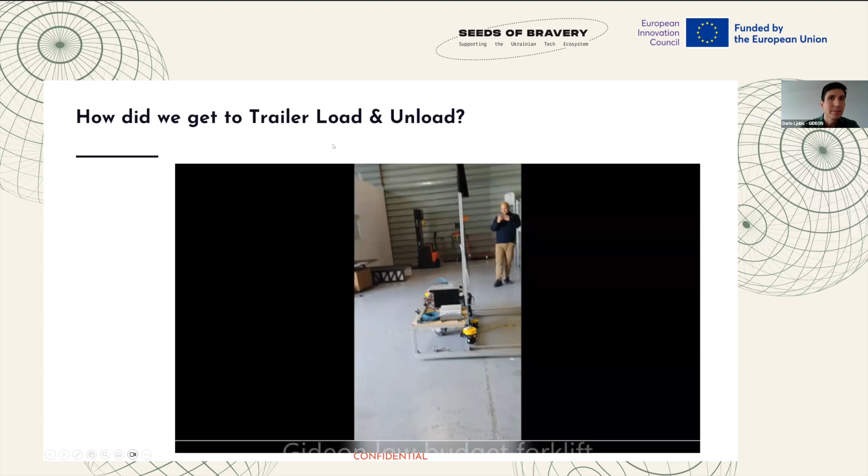Key lesson, again: go to customer sites as soon as possible. As soon as you have some kind of an MVP, something that can prove a little bit of value, go to customer sites. Because the lessons you'll learn out there on the field are not possible to be learned in your facility. And we learned that the hard way.

We wanted to position everything the perfect way. We wanted to make sure everything's perfect before we go to the customer, to their site, and really deliver the solution. Once we were there, nothing was the same. Everything changed, the playing field changed. And now we had to learn a ton of new lessons and iterate very quickly to adapt to this new reality. So as soon as possible, go to the customer site and really experience this real life implementation. I think that's key.

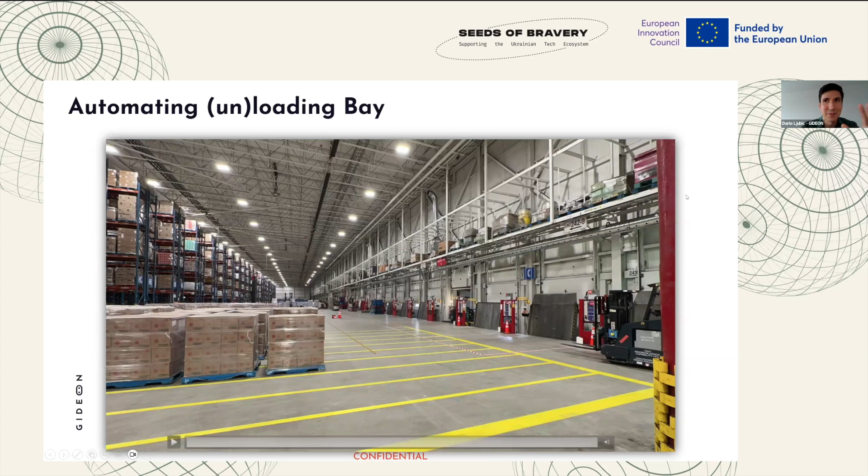One additional lesson: always record videos. You'll need it for other customer conversations. What happens in the background - this is what happens in the background. You're probably interested in technology, so I wanted to include this as well.

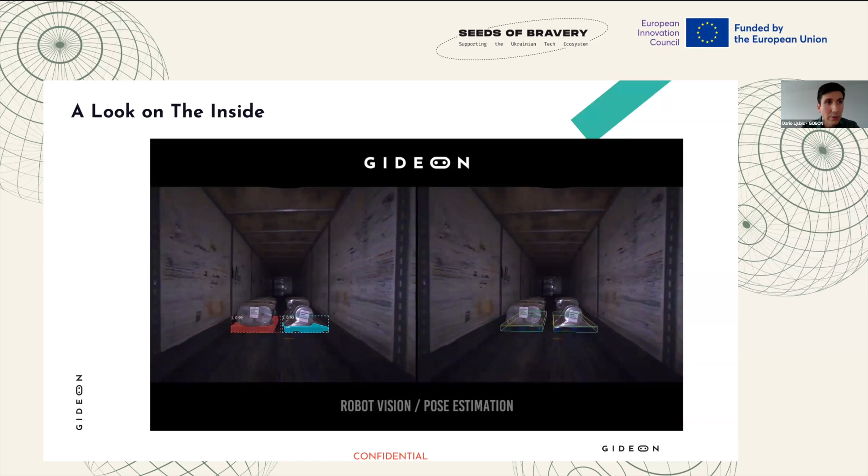The vision system that we have is able to recognize all the different pallet types, their positions and orientations in 3D world in real time with some certainty. And we can also differentiate between 30 different classes of objects that we use or encounter in warehousing and manufacturing.

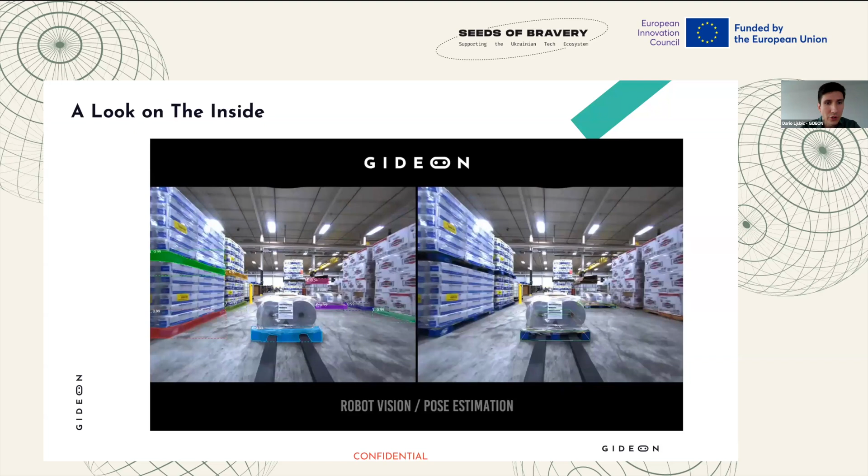The reason I included also this video is an additional key lesson. Early on in your journey, customers will ask for other references, and you may not be able to provide those references. Of course, we all need to start somewhere. So videos like this can help very much with early adopters. Find those early adopters, find those people that are very passionate about technology. Go to those companies first. They will help you create those references that you will need to unlock the majority of the market.

So, key lessons learned, additional lessons. Hardware is hard - I'll just quickly go through this. Hardware is hard and very costly in terms of time and funds, because you need time to procure hardware.

You need time to assemble hardware, to design it. Once it's designed, it has to be tested. Once it's tested, you can deploy it at the customer environment. If something is wrong, you need to pull it back or go to the customer environment. You cannot simply update it remotely - you need to go there. So be careful of how you design the system and iterate.

Then make sure you understand the customer pain points in detail. We thought we understood customer pain points, but once we got on site, we learned a ton and really understood that we don't know anything. So it's good to go out to multiple customers and get the average, not just tie yourself to a single customer or a single industry. At least that was important for us because we're aiming to unlock the majority of the market.

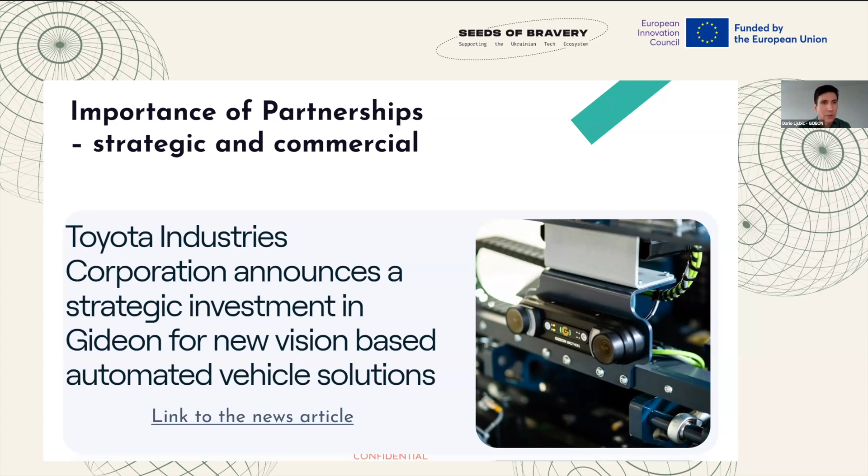For the final lesson, it's worth repeating: success starts with people. You need to focus on people and find those who will help drive the company forward. Maybe you're a solopreneur story in the beginning - that's fine. As you scale, you'll need other people to help you build this. That's why I'm repeating this, and that's what we've learned as well - it really starts with the people. With those people, we can then build the technology, serve our customers, and unlock huge opportunities in the market.

And with that, I'm finished with my presentation. Thank you.

Perfect, thank you very much, Dario. I think it's great to see the startup side of the story, and it's really nice to hear your learnings from this experience. I actually already see a question here for you.

So the question says: Dario, this is really important to make a pivot based on jobs to be done and other metrics. I created my first service humanoid robot in 2018, and that was hard. How do you see the future trends?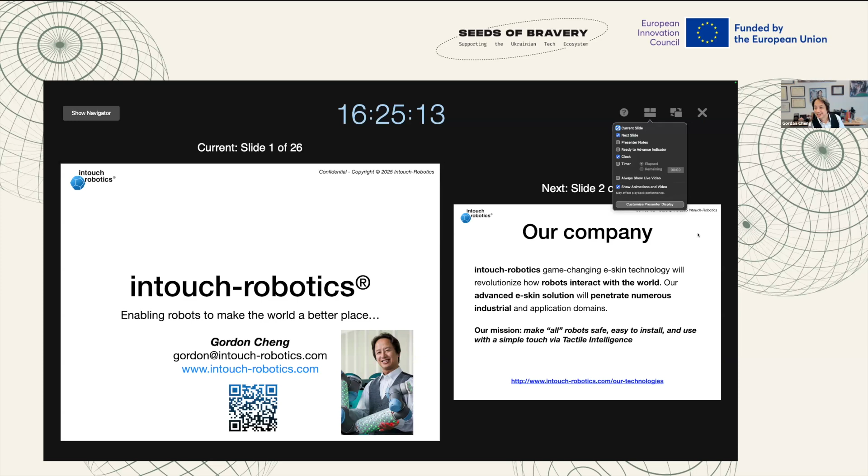Can you see my presentation? We can see your desktop. Now we see your presenter side of the presentation. Presenter, the correct one. Okay, not the navigator. Well, no, the navigator. Oh. Okay, now let's see how to switch it. Oops. Okay, let's see. Navigator? Yeah, still can see both slides. Okay, look. I'm just trying to work out how to switch this. How about that? Perfect, works.

Okay, hello, good afternoon. Thanks, Maria, for inviting me to talk about InTouch Robotics. I'm Gordon Cheng. We started InTouch Robotics a few years ago to address a particular issue about safety in robotics. The presentation will go along the line that I'll introduce you a little bit about InTouch Robotics, and then I want to discuss something about fundraising using the EU mechanism for gaining some of the support from the EU Commission, and I'll give you some of the experience of how we actually ended up in this place.

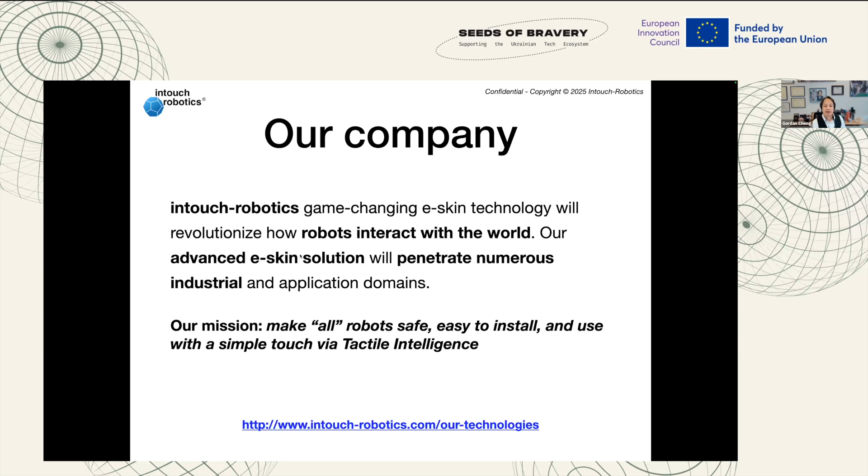Okay, so InTouch Robotics started a few years ago. It's based from a university research project, and it spun out a couple of years ago into a company that provides something called robot e-skin technology, which allows robots to interact with the world. We also want to make all robots safe, easy to install and use, just by providing what we call tactile intelligence — another level of artificial intelligence that we want to equip the robot with.

The technology impact that we ended up looking over the domain was industrial automation, and it was great that Lukas and Tommaso talked about robotics in industry, and also now the big trend is humanoid robotics. So we're trying to cover all the technology, providing e-skin across all these domains: industrial robotics, humanoid robotics, in particular service robotics, and applications in logistics, entertainment, and even healthcare.

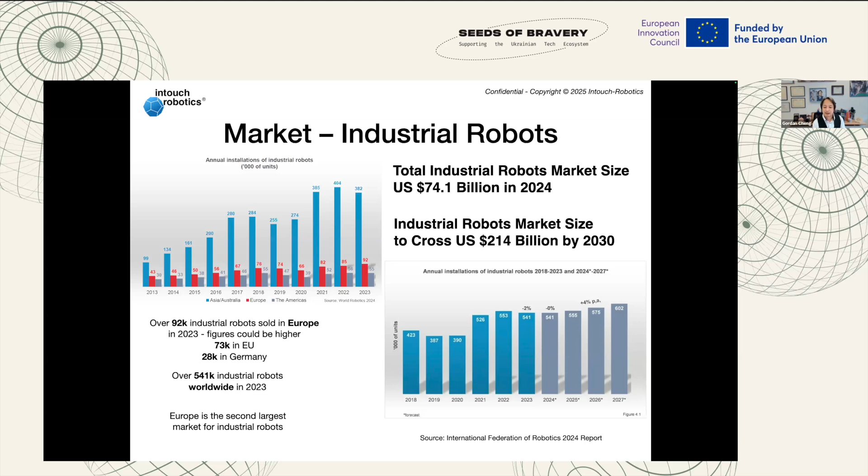And the way we've been looking at the market — I think some of these numbers have already been mentioned. The total industrial market size in the US alone is about 74 billion in 2024. And the industrial robot market size across the US is something like 214 billion by 2030. We're looking at something like, over the last couple of years, it's in the vicinity of 540 thousand. So it's a very big market, the industrial market.

The other interesting thing is that phenomenally, there has been almost one new company started on humanoid robots each week, at least one, in the last year and a half.

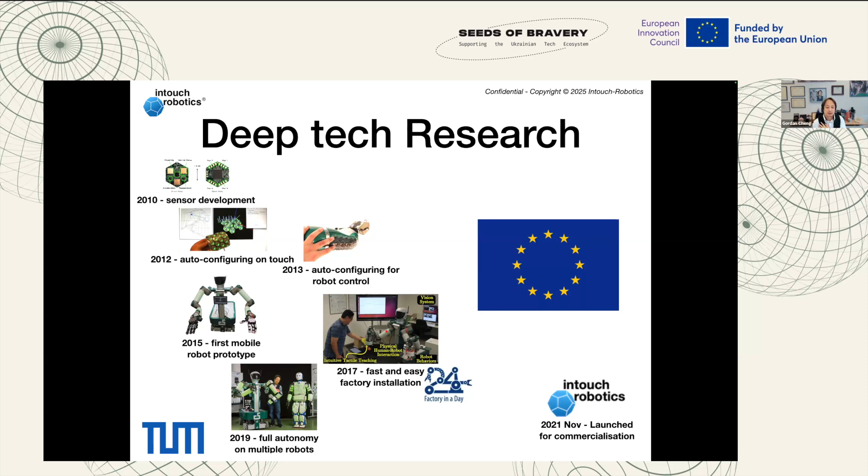How it actually started was a project called Factory in a Day, funded by the European Commission, based on a Framework 7 program. Our ambition was to develop a robotic system that can be set up within 24 hours and leased by any company.

Why we wanted to do this, and it's still the current situation: many small and medium enterprises do not use robotic systems because of the lack of flexibility and unreasonably high cost in getting started with robotics. So this was our vision.

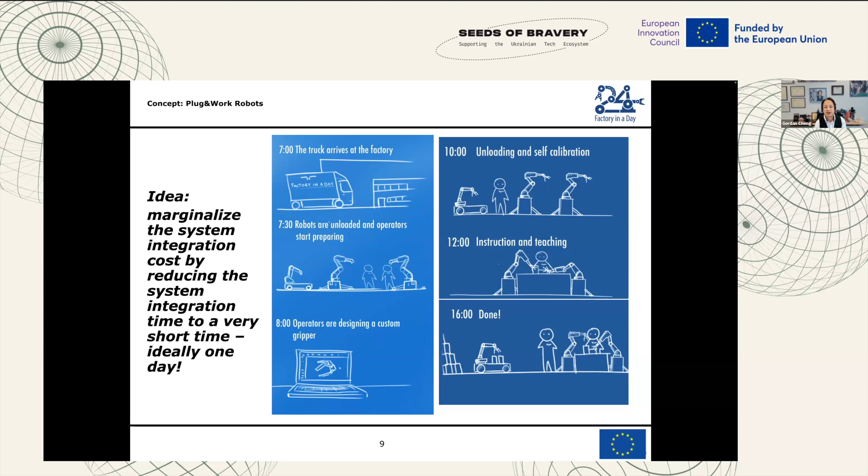You have a truck arrive at the factory, robots are unloaded, the operator starts preparing, designing a custom gripper or whatever, then the self-configuring, self-calibration of the robot happens, and they provide instruction and teach the robot, and it's all done. So you go from 7 to 4, and you have a system fully capable for whatever use cases in a small factory. That was our vision at the time.

In a typical European project, if you apply for European funding, you need a large number of partners, typically ranging from universities to large industrial partners to small companies or SMEs. For example, Lukas is a very small gripper company, and you have a large project partner like Siemens, a large conglomerate. Then you have a university like the Technical University of Munich, where I'm from, and Universal Robots, a more medium-sized corporation producing industrial arms.

So the robot ended up being very interesting. We could actually teach a robot to self-configure, and based on touch, teach it tactile handling. The example we were looking at, the use case, was sorting oranges, because we were working with a Dutch partner on how to actually sort oranges.

Usually you squeeze the orange: if it's firm, you put it in a box for selling, and if it's a bit squishy, you put it in a box for juicing. There's a whole lot of AI behind this, and a whole lot of robot controller development that came out of this particular effort.

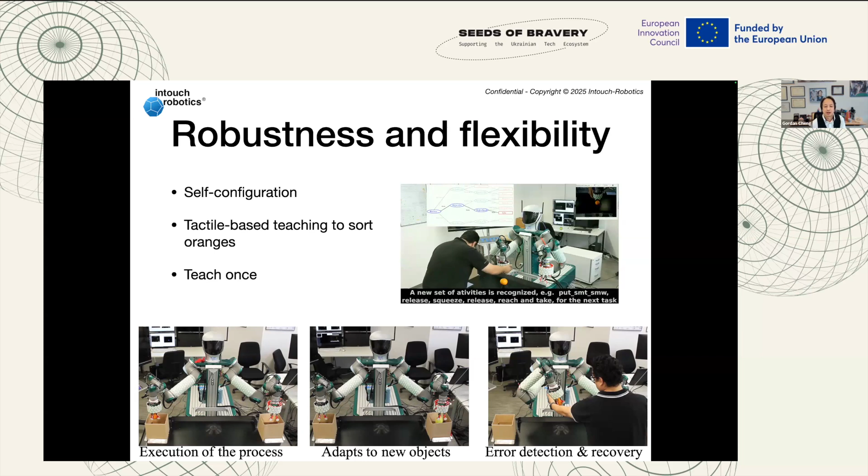The ambition of the company at the moment: last year we did a huge pilot study on many different robots. I think last year InTouch did 4 humanoid robot installations, including a service robot and multiple industrial robotic arms, to validate some of our ideas.

We were very surprised because we were contacted by a humanoid company due to the explosion of humanoid robots in the last year and a half. They asked us if we could do installation on their humanoid robot, and we have now validated 4 different humanoid robots.

Across the world, we have at least 2 done in Japan and a few in Europe that have been installed with the robotic skin, or e-skin, that we are providing. So we are looking at scaling up production to meet the demand of different industries and robot makers. In a couple of years, we will start moving into one technology for many applications and domains.

I just want to give you some examples of things we installed recently. On top, you can see a humanoid robot that is completely safe to interact with a human, and the robot is being controlled just by touch.

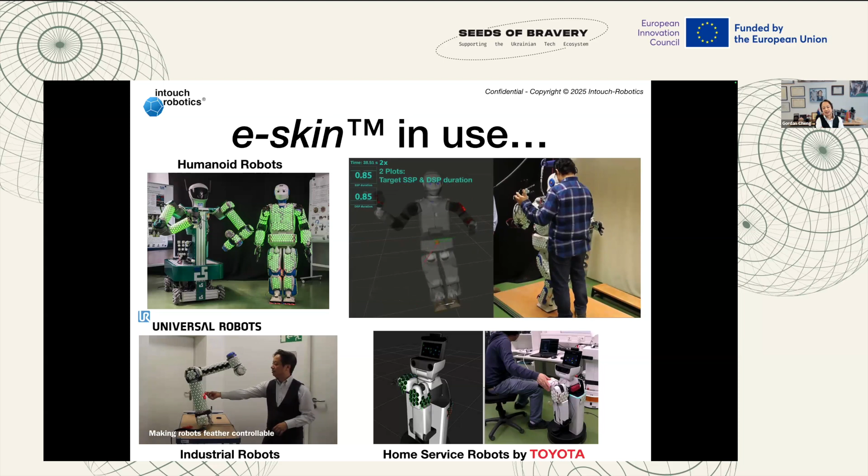On the bottom left, you can see an industrial robot arm that we can actually control with even a feather touch, very light control. Imagine you can teach a robot just by touching it and guiding it, and it starts working on its own. On the bottom we have a service robot we've been prototyping with a company, and a humanoid robot—just to show the safety aspect, we even had somebody dance with the humanoid robot. This illustrates the high capability you get by installing electronic skin onto any robot.

Okay, so now I want to step away from InTouch. That's how we got there, that's the enabling technology we created. But to actually promote Europe as a robotic innovation center, I picked up a couple of use cases.

I think one of them has been mentioned already—there's a company called ANYbotics, based in Zurich, and they've been having phenomenal success doing inspection. Lukas already touched on this—inspection and other use cases in harsher environments with a quadruped robot. There's also an ecoRobotix doing a lot of farming work needed in Switzerland. And there's a Moon Surgical robot—very interesting, looking at robotized surgery beyond the standard Da Vinci robot. They've been having quite a lot of success.

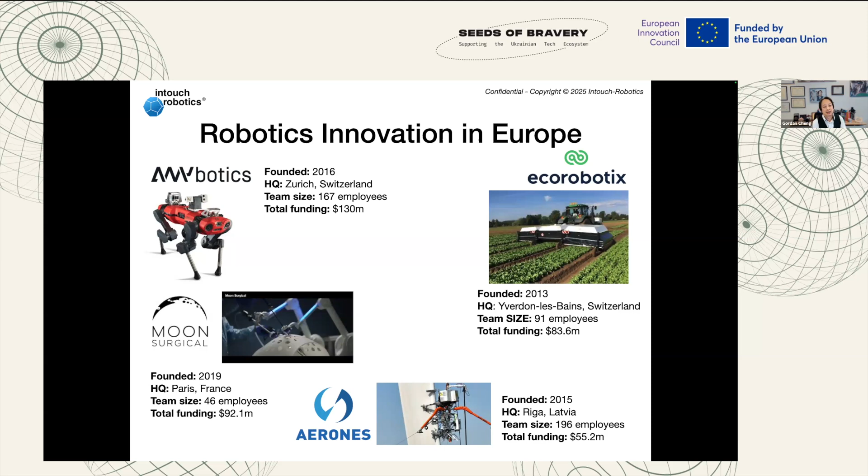So I just want to give you an idea of some of the European opportunity. The European Commission has been very proactive in supporting what we call SMEs, small medium enterprise companies. The main factors for these enterprises are staff count, turnover, or balance sheet. If you're smaller than 2 million, you're micro; smaller than 10 million, you're small; and medium size is less than 50 million in turnover. Any of these SMEs can apply for a grant with the European Commission.

One interesting thing more recently is funding based on the readiness of your technology. The European Innovation Council has been pushing this quite a lot. They have a budget allocated from 2021 to 2027 at 9.7 billion, allocated to providing technology readiness support.

From technology readiness level 1 to 4, you can apply for something called Pathfinder—I'll give you some detail about this in a minute. The allocated budget already in 2021 is 300 million. The other one is EIC Transition, which allocated something like 100 million already in 2021.

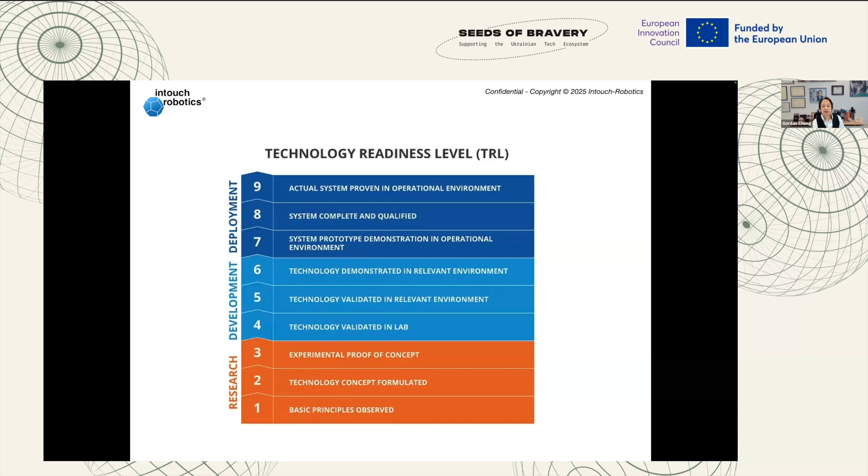So I'll give you a quick rundown on Pathfinder, which is probably at the groundbreaking research level, with the long-term aim of industrial commercialization. The interesting thing is that at the lower level, the timeline tends to be longer—you can have projects up to 48 months.

And these are just some of the statistics: in the 2023 call, they had 368 submitted proposals, and in the end 43 projects were actually funded. The nice thing is you have 150 million invested across 64 countries, and the consortium requires at least 3 different legal entities established in different countries.

A single application works because one person has to lead the whole consortium. The standard EIC Pathfinder can be very open—you can actually develop a concept and then just submit a proposal.

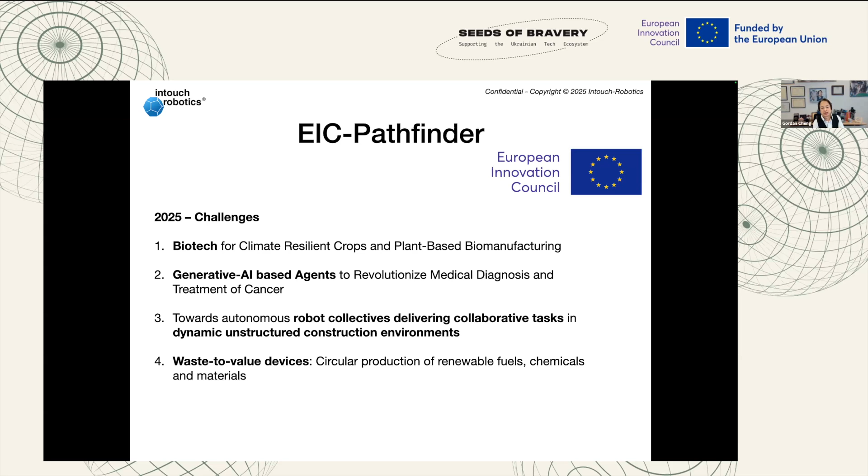But at a more specific level, they have something called EIC Pathfinder for Challenges, which is very interesting. The next current call for challenges is focusing on biotech, generative AI, robot collectives delivering collaborative tasks in dynamic and unstructured environments—that's one challenge—and waste-to-value devices, which is more of a recycling idea.

The transitional side is that you're almost at the development stage, ready to develop your first prototype or something along that line. This is where InTouch actually initiated as an initial starter in that area.

This one tends to be a little bit shorter, about 36 months per project. In the 2024 call, there were 415 proposals submitted. Only 27 projects got funded, but they invested something like 94 million across 21 countries.

Interestingly, an SME or organization can actually lead one of these projects. The consortium tends to be smaller, probably a minimum of 2 and a maximum of 5. Larger companies that do not qualify as SMEs are not eligible, so this mainly keeps it to SMEs and spin-off companies coming out of these research labs.

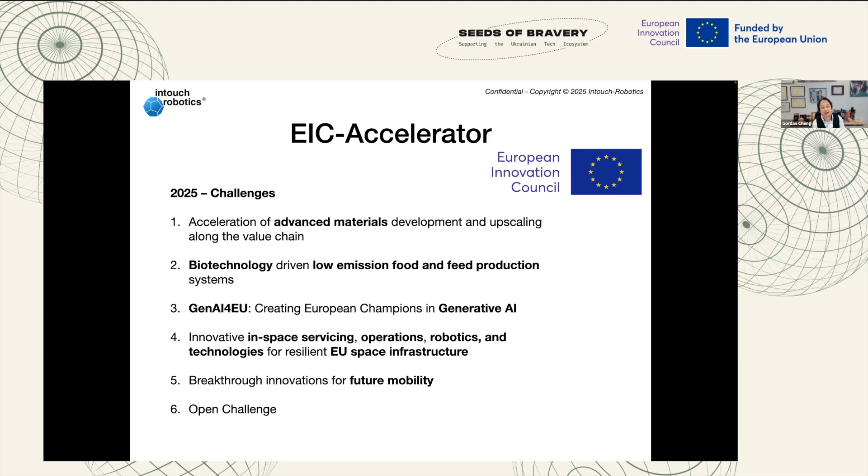I want to finish with this last thing that's interesting for how InTouch actually started—the Factories of the Future program. It's usually mixed, and they allocated something like 1.15 billion in public-private partnership focused on developing advanced manufacturing technology.

The SME consortium eligibility requires an innovative SME to lead the proposal from one of the EU's Eurostars countries. The consortium has to be composed of at least 2 legal entities independent of one another, and the project consortium must include at least 2 European countries with 1 organization from the EU. Horizon Europe also has a number of associated countries you can bring in to get funding from the EU to join the project.